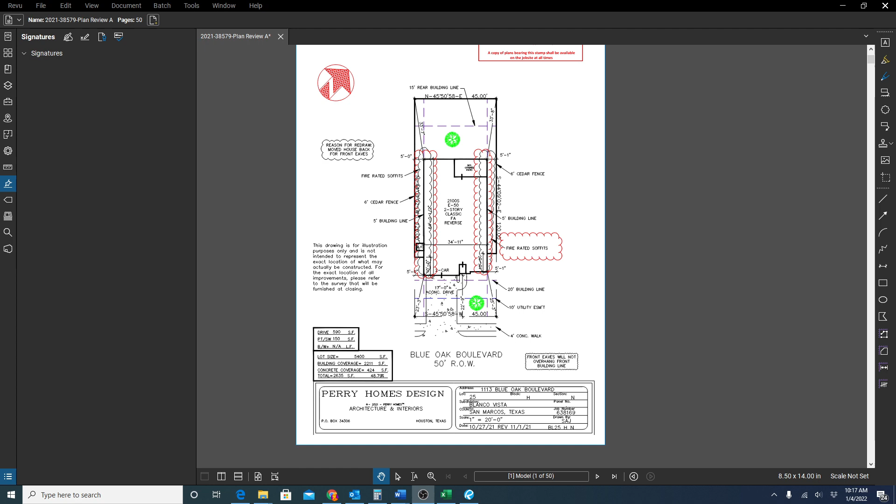So we're going to do a quick video on reading a site plan and figuring out when you need to worry about soffit overhangs. So I'm going to go ahead and take off some of these red lines and stuff. And this one was graciously redlined partially by the builder. And we're going to look kind of at what we need to see on a site plan.

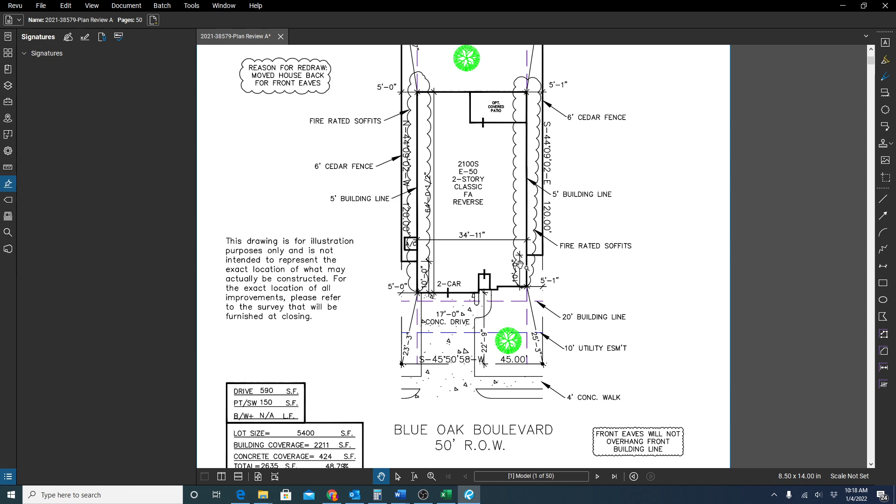So you always need to see a rear setback line, side setback lines clearly marked, and a front building line. And if there's any utility easements and everything else, it's normally something that your planner will look for, but it's a good idea to have all of that information on there.

So let's touch on when we actually need to have a fire rated soffit. So per code, it's chapter 302 I believe, touches on this. The way that the residential building code reads as opposed to commercial building code is your property line is your center line between properties. So from your property line, if you're 5 feet or less, you start having fire rated requirements.

What you'll mainly look for right off the bat to let you know that you might have a fire rated issue is houses that are built right on that side setback line. So this house is 5 foot 1 inches. This would require a fire rated overhang. Anything less than 5 feet will require a 1 hour rated wall down to 3 feet.

At 3 feet to 1 foot, you have to have a fire rated wall, a fire rated overhang, and less than 25% of the windows there. You won't see much of that. And at 1 foot, you won't be able to have any sort of openings or projections. So this comes in important later on for determining, let's say you have overhangs. Commonly you would see them on like Pacesetter homes, which we have an example of a set here.

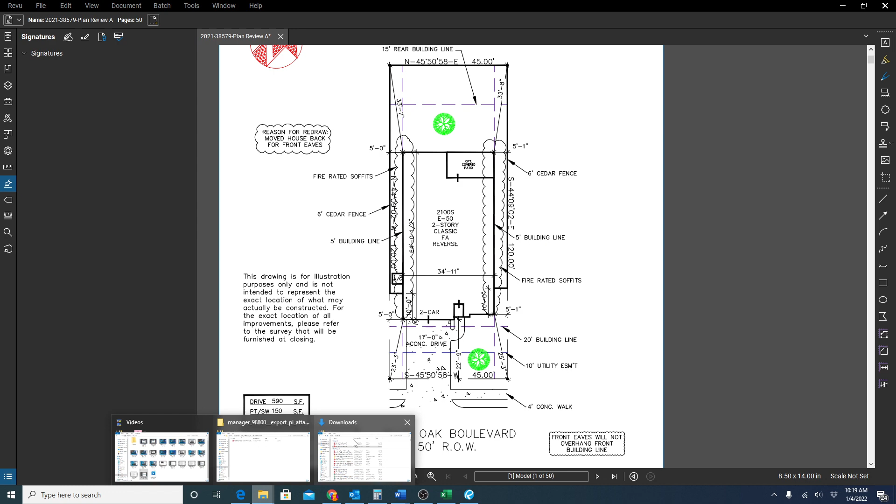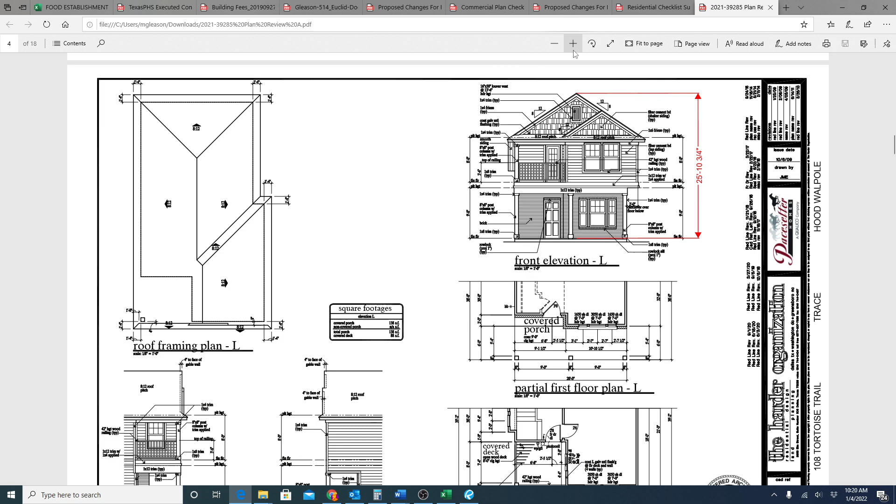So you have a house that's at 7.21 feet. Now, at a casual glance, you really wouldn't need to worry about potential overhangs. However, in this plan set, you'll notice that there is a 2 foot cantilever. And a lot of times in your site plan, especially when it's Pacesetter homes or other homes like that, they don't show all of the roof projections. Sometimes they'll show the extra box windows and projections on the site plan, but most of the time they won't.

So that 7 foot, you've already eaten up 2 feet of that, and you would have to have a fire rated soffit because then you go another foot past the 2 foot. So you have reached 3 feet into that area. So that 7 foot disappears and becomes a fire rated assembly. And sometimes, depending on where it's located on there, it will be a fire rated wall or anything of that nature.

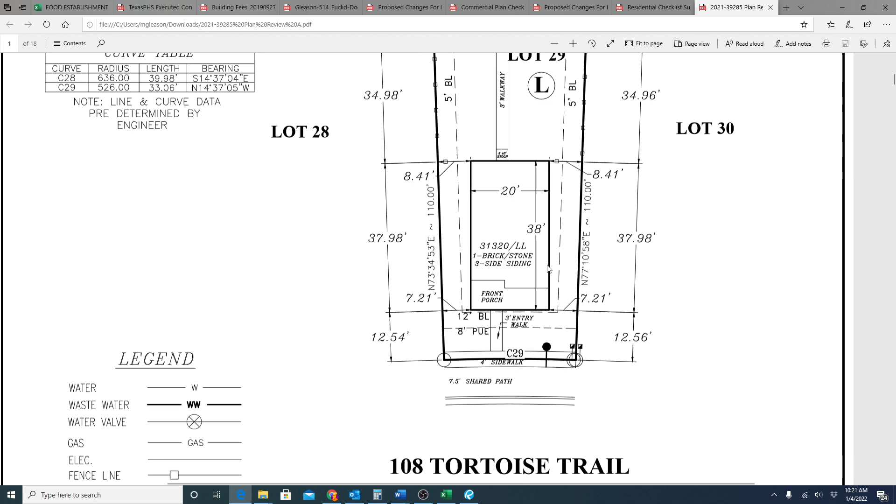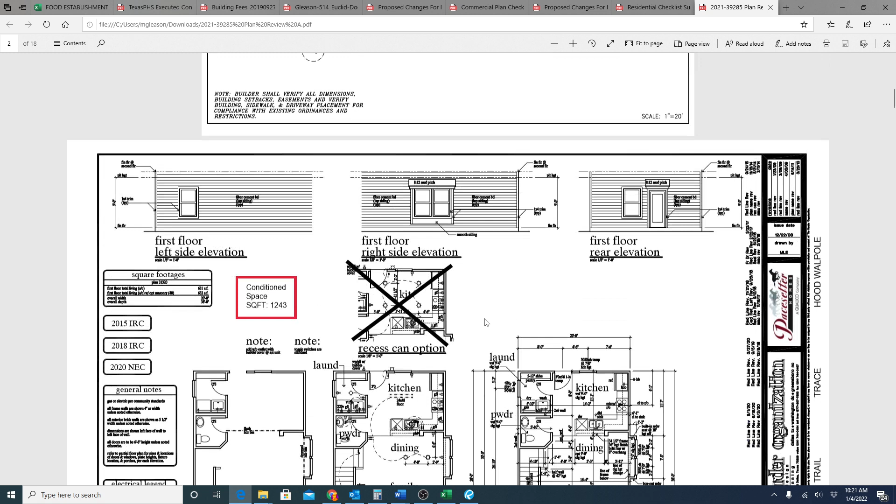What you'll need to try and determine is if the site plan shows the overall footprint of the house or if it just shows the bottom floor footprint. So we're looking at roughly a 20 foot wide structure, 22 foot wide with the second floor plan. So how wide is our house?

Well, if you're counting the second floor structure and it's supposed to be 22 feet wide and you're measuring a 20 foot wide footprint, they're showing the footprint of the slab, not the footprint of the actual top of the house. So this will actually require fire rated soffits, and for that 2 foot overhang, a fire rated assembly towards the front here. On a V-lot, you can take all this into consideration, but it's good to just kind of mark it on the plans as a catch-all.

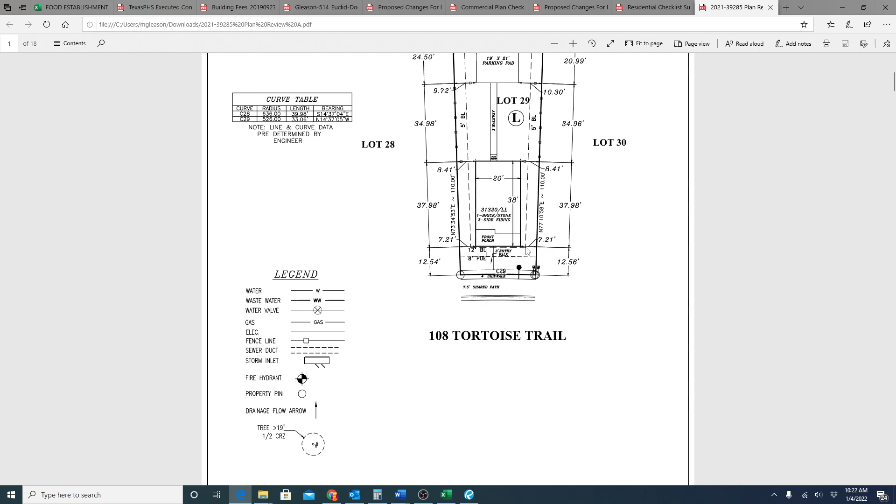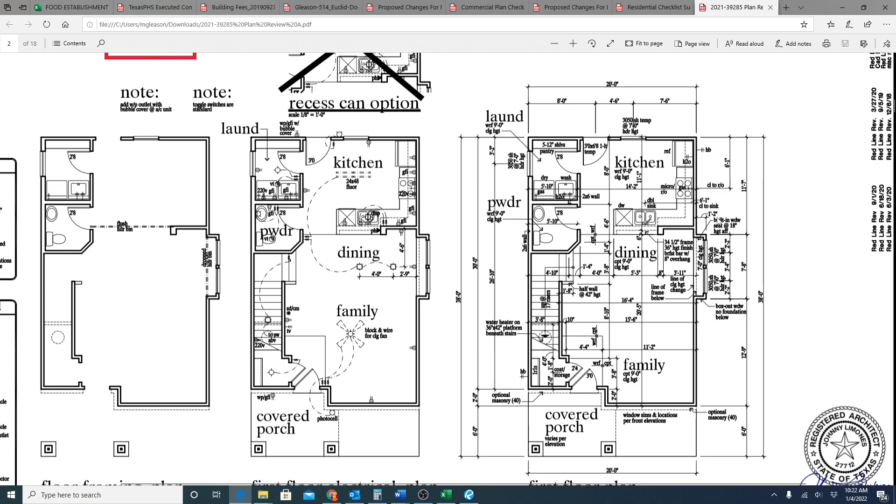This is kind of one of these situations where it turns out to be a bit more interesting than at first glance. Same with box windows. You'll generally check and see how much projection. Usually you have a foot 2 inches on projection for a box window. You have your 2 foot projection for your overhang, then your additional 12 to 16 inches of soffit. So this house definitely requires a fire-rated soffit.

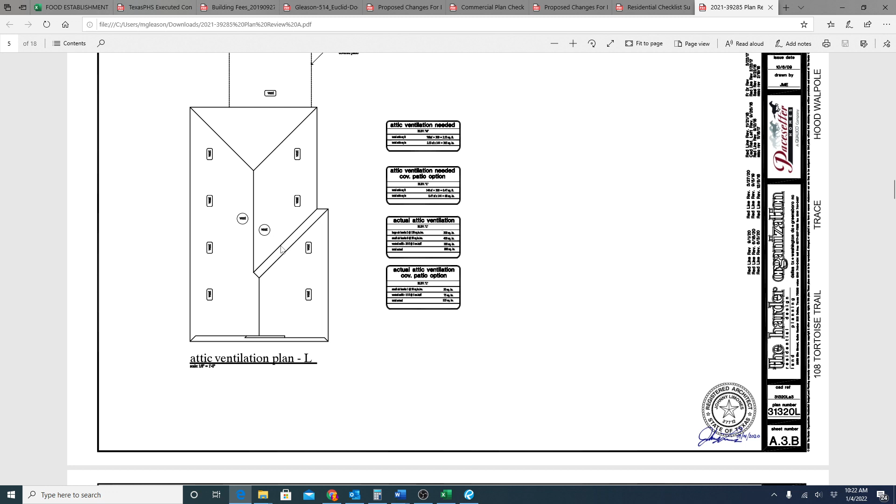What you'll want to look for when you do have the fire-rated soffit is that the plan accounts for having low side venting to make up for the fire-rated soffit. We'll touch on venting calculations later. So this is where the fire-rated overhang details become very important.

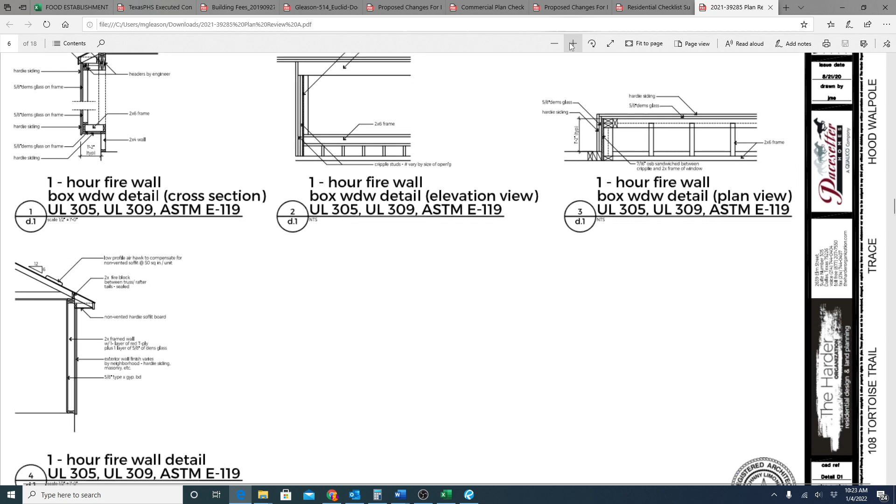Most people who design residential houses will give you the wrong UL listing. They'll give you UL 263, which would be a wall in between a duplex or a wall in between a townhome. What you're going to look for is 305 and 309. 305 is going to be your exterior wall cladding, and 309, I believe, if memory serves me right, is the underneath fire rating. This will have to have Hardie off of it at inspection, and generally you'll inspect for DensGlass here.

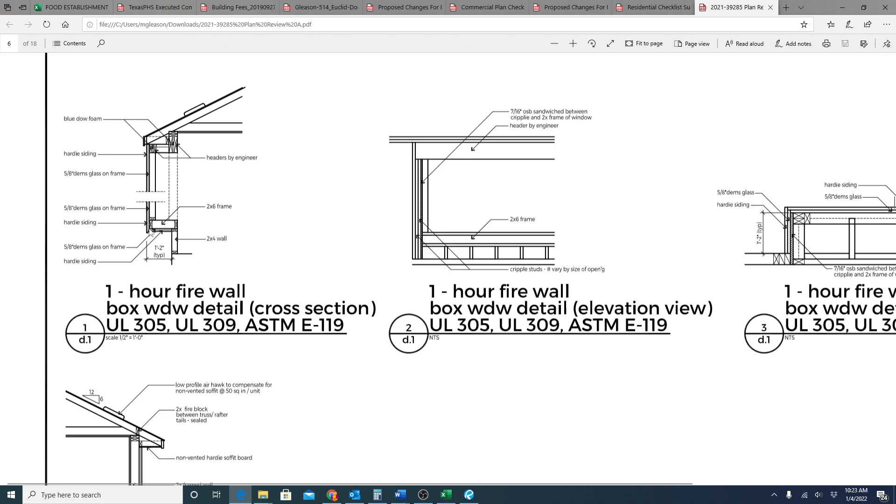But whenever you see a projection in the fire rated area, you need to make sure they have a fire rated wall assembly in the plans. It's incumbent that you verify this. Now let's say that you want to verify what UL listing you're looking for. I used to have it bookmarked here.

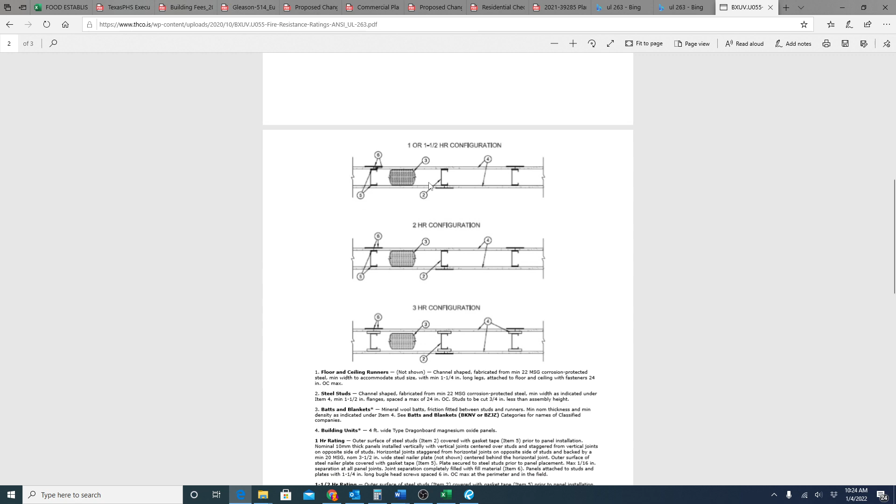Generally, you can just hop on Google and do a search of the UL assembly. So this one, unfortunately, is a standards library that you end up having to purchase. What you'll generally look for is a PDF in your search. And this will show you the various configurations for the UL listing that you're wanting to see.

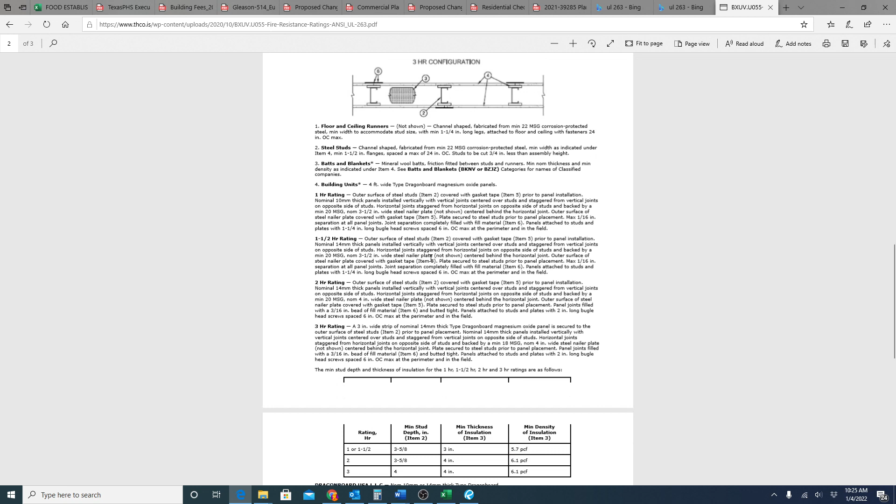So they'll have like a steel version, all of the different types of permutations of how it's put together, where you locate insulation, what materials you need, how many layers of said material you need. So 263 is going to be your fire resistance between two structures, non-load bearing wall generally. So let's see, we'll check 305. It's good to actually check your assembly detail.

So this is going to be like an exterior load bearing wall fire rating. Generally you'll have 2 layers of Type X. So to achieve your 1 hour rating, you'll have 40 minutes of Type X on the exterior insulation, then 40 minutes of Type X on the interior. I know technically that's 80 minutes, but they consider that a 1 hour rating.

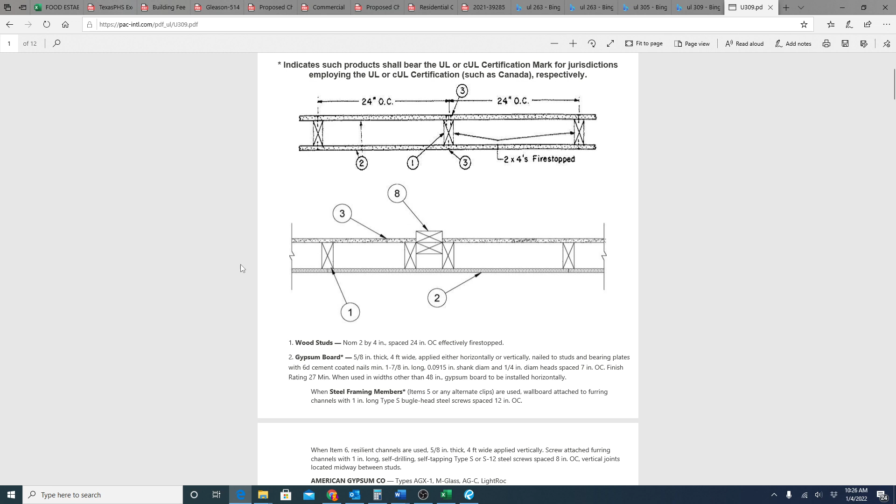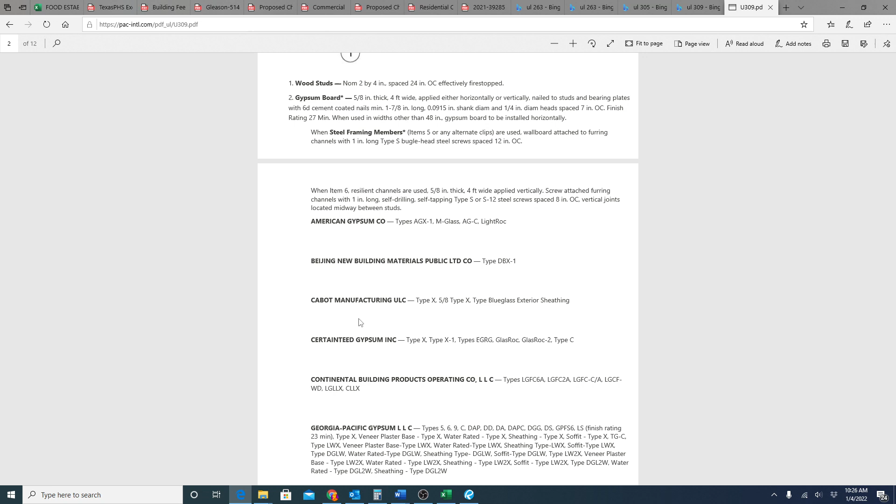309 is like a shaft liner assembly or a bearing wall rating. So it's also usable in a horizontal assembly. So as you're going through a set of plans, make sure they're actually listing the right type of UL listing.

It's important that you actually familiarize yourselves with the ULs that you'll generally deal with, which will be 309, 305, 263, and I think there's 280, 283. Those are going to be most of your residential wall fire assemblies. Well, that should be it for the quick run through site plan and fire rated soffits and overhangs.